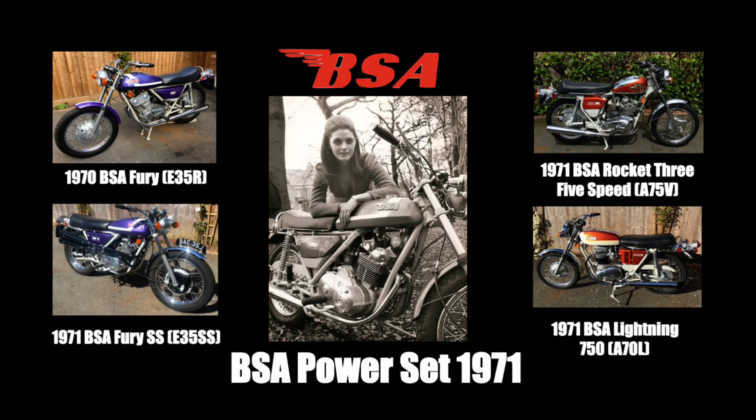Hi everyone, Saturday the 18th of November... what am I talking about? It's Saturday 18th of February 2022. It's not my birthday yet.

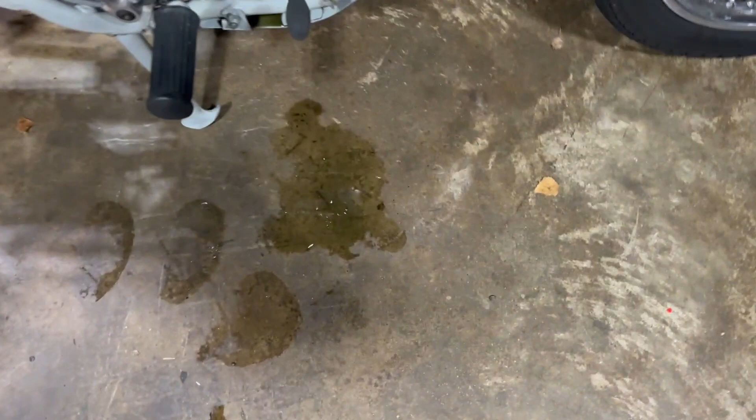What's happening is there's obviously an oil leak somewhere underneath, which is being captured on the bash plate and dripping out on this side. The previous owner thinks he knows what it was and it should be easy enough to fix, but we've got to take the bash plate off anyway so we can check the sump as well.

Now, oil changes on this are a bit more involved, so let me take you over to the manual and show you the intricacies of the oil in frame.

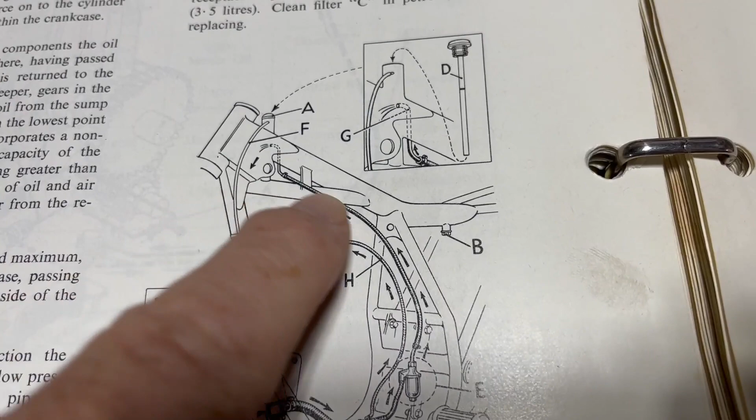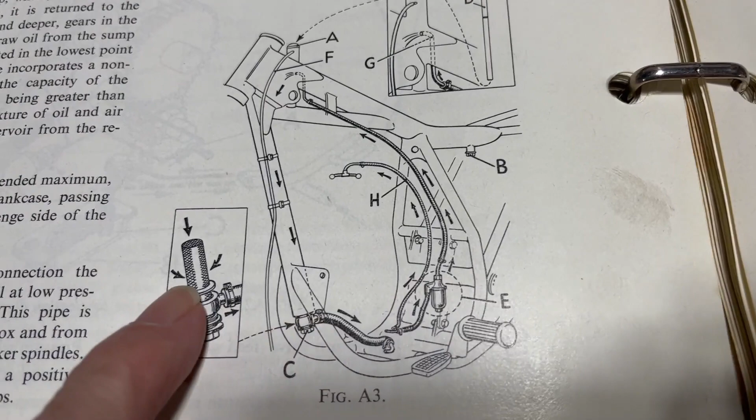So there we are in the workshop manual. You've got the main spine at the top here, the handle, which holds oil, and also the front down tube holds oil as well. Oil is fed from a union underneath a gauze filter at the bottom here to the engine, and returns at the back through a full flow oil filter in a canister up to the top here and to the steering head.

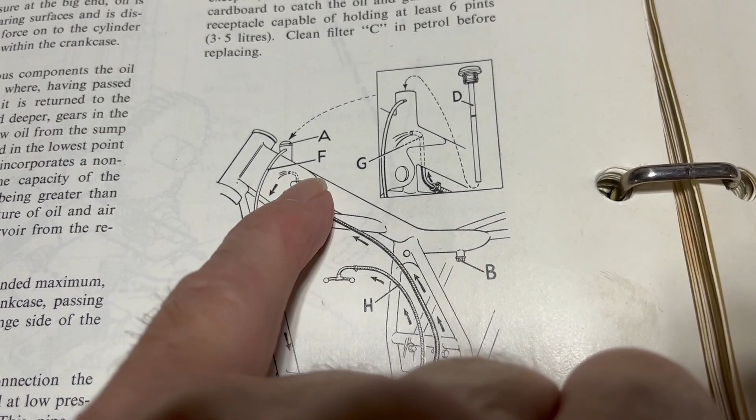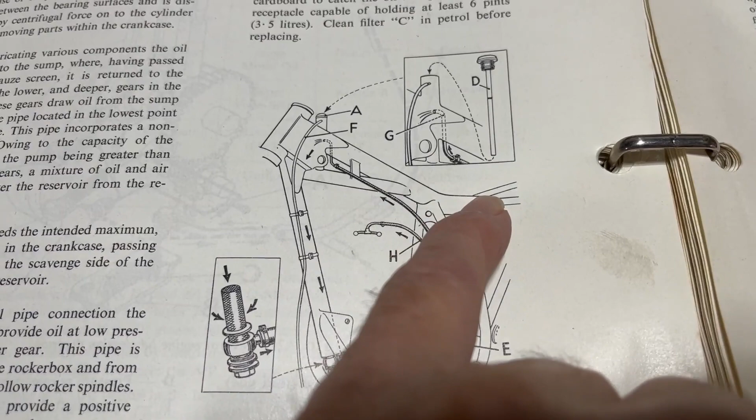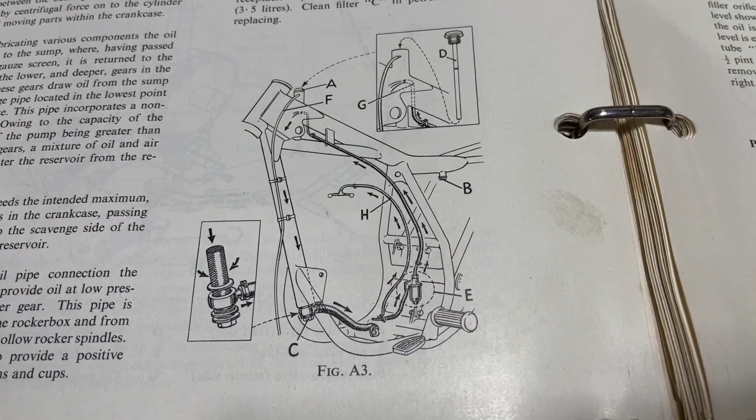Now, there's been lots written about the fact that oil at the back of the main spine isn't going to circulate as well, and it probably doesn't, but I presume when you're riding there will be some mixing of that oil. Why it was designed like that, I have no idea, I'm no engineer. But anyway, the point is we've effectively got three drain points.

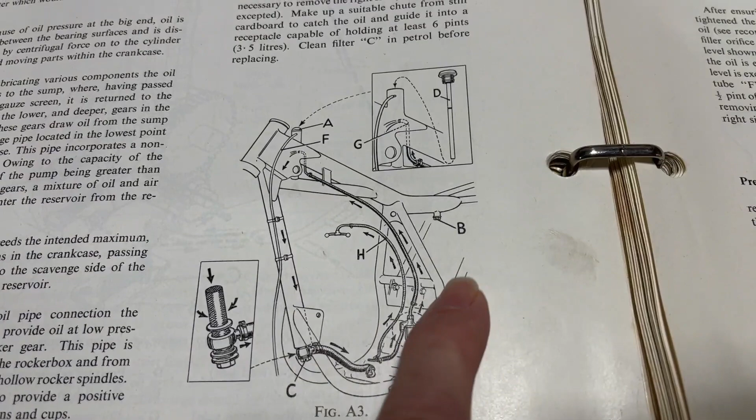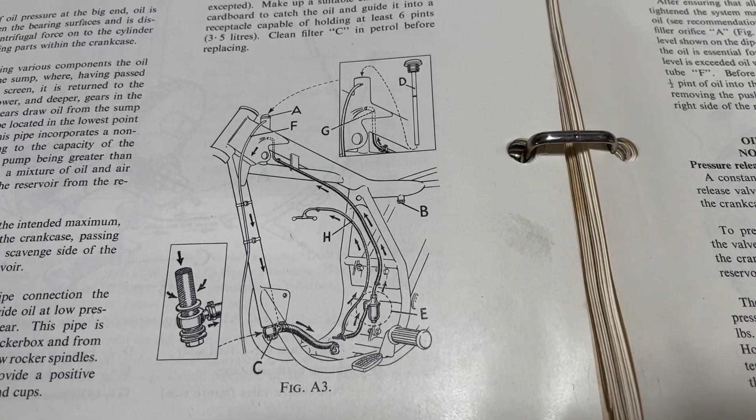We've got to take this union off here to clean that gauze and drain the down tube. We've got the oil filter to change, you can clean that in petrol but I've got a new one, so we'll put that in, the full flow oil filter. Then you've got to drain it at the back here, because just taking that out isn't going to drain this lot. You've got a plug there, so you've got to take a side panel out to do that. But first, let's get back to just getting that bash plate off.

That should be easy enough to do. Undo the nuts on the bottom engine mounting stud, just loosen them off, because the bash plate is slotted at the back there. Undo its two mounting bolts at the front and it should pull forward that way. And we'll have a look underneath and see what on earth's going on there.

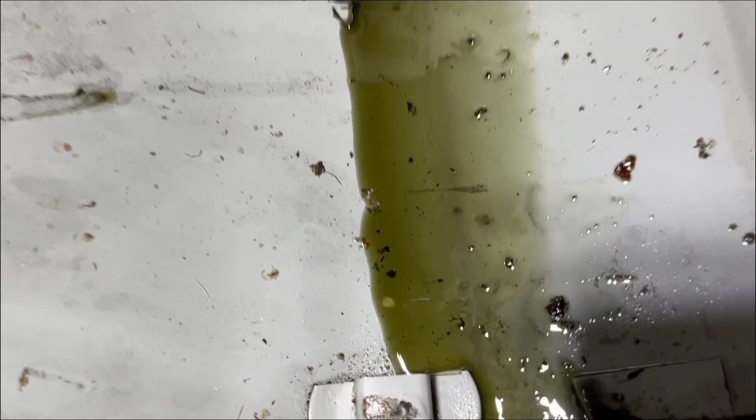Okie doke, first job. Right, two minutes later, bash plate off. Looks a bit like engine oil to me, that.

The front two mounting bolts are really short and actually have no washers on. I'll just check that's correct, because they don't look very secure. They were done up tight, but if the bottom of the engine gets a good bash when you're green laning or whatever, would that hold very much? But anyway, that's as it was.

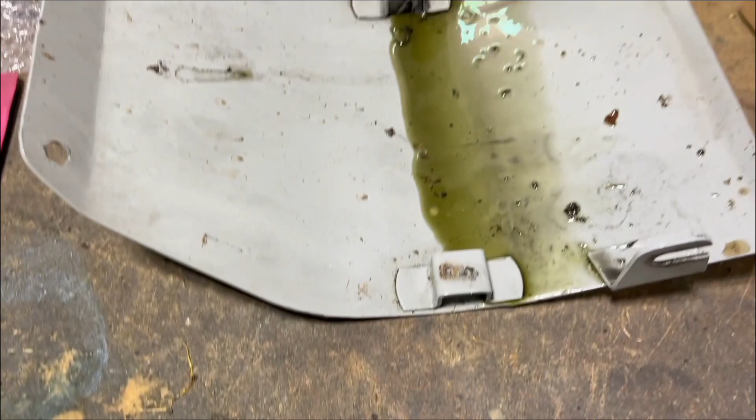And just while we're here, there's your little full flow oil filter, which are pretty readily available.

So let's go and have a look underneath that motor and see what's causing it to leak a bit. As I say, it's been stood for probably nearly three months now, so there's not much come out of it. Just one of those annoying things which I hate.

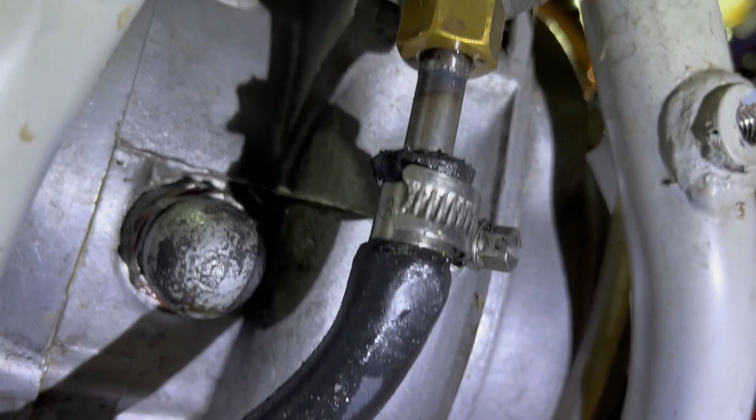Well, there's a few things to note under here. This is very tight here, and I've got a funny feeling that tube is cracked. The oil line is cracked a bit, the rubber tubing, so we might have to replace that. Doesn't seem to be anything coming out here, but that's obviously a new fabricated union at some point.

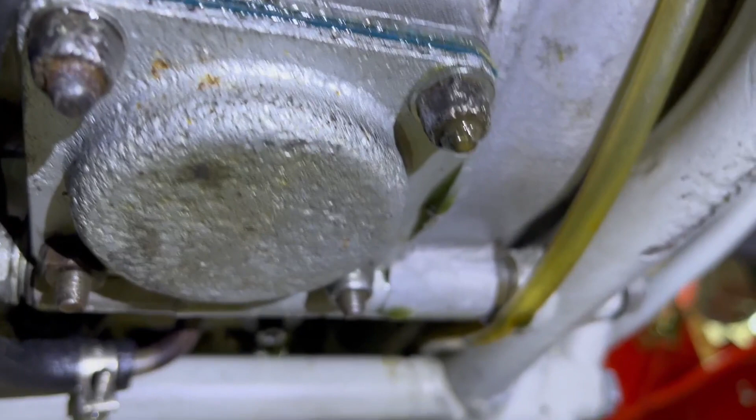Bit of oil around the sump plate with nothing much. Some just here, which means it might have wet-sumped its oil, but we'll soon find out.

Excuse me, but where it's dripping from is here on that oil line again. So we'll check that out. I think we're going to have to replace that.

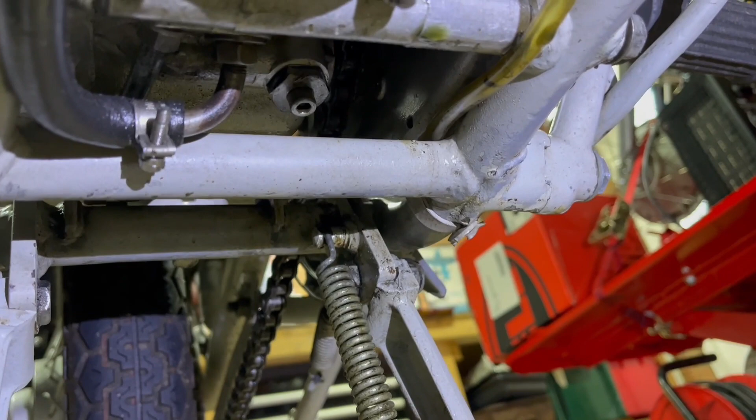And also, somebody's obviously tapped what I think is the gearbox drain, and put a little drain plug in there, but it doesn't look to be leaking. Not too bad, just a bit of accumulated oil. Maybe the problem we've got is just it sumping its oil as always, but we'll soon find out once we get that sump plate off.

I've just loosened the sump plate and there's the oil flowing out of it, so it's sumped oil. That might explain why it's weeping a bit out of the bottom cases.

These do have an anti-drain valve in them, but like almost all of them I've come across in any model - the triples, the twins and the singles - they very rarely work well. Anyway, let's get this lot drained off, then we'll move on to the other drains.

The gearbox obviously is a separate reservoir for EP90 oil, and also on these, the primary case is a separate reservoir as well for sort of straight 30 type, or normally, or you can use ATF. So we've got all these different reservoirs, and not forgetting the rear plug and the front plug on the frame to drain as well. So it's a bit involved.

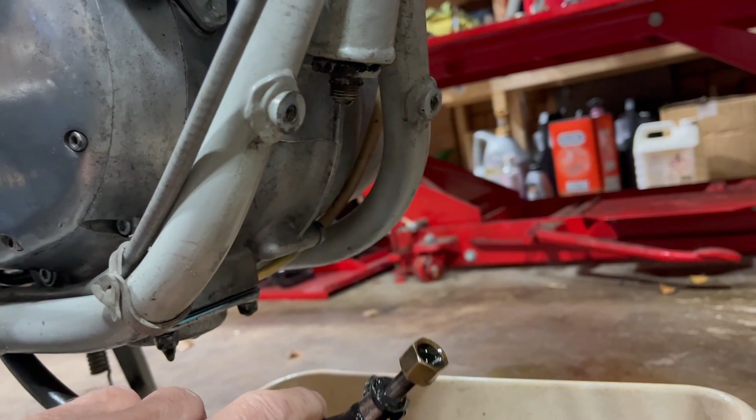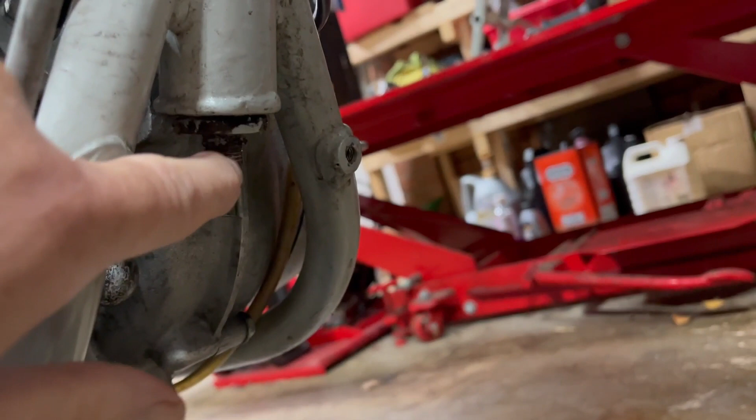So I've taken the oil feed union off what will be the gauze filter nut at the bottom of the front down tube. So that means now we can get a socket on this to get that out and just clean that gauze filter.

So it's emptied the front tube, but it hasn't emptied the top spine, so we've got to do that next via the plug at the back of the top spine. So let's get this out first and see what this looks like anyway.

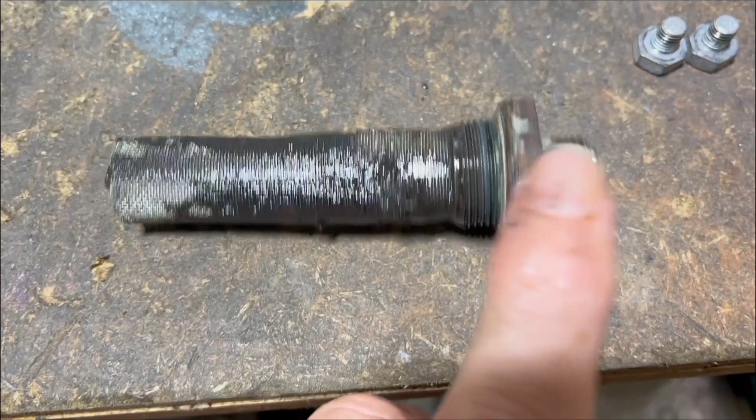Well, it's looking a bit sludgy. Yeah, so it's ready for a change, I think. The oil itself doesn't look too bad, it's a bit dark, but when you put your finger in it and test it you can still see the original green tinge. So I think it's Duckham's or something like that was used, some sort of classic oil. But that definitely needs a cleaning in petrol.

One thing I've also noticed with this and other unions, drain plugs and things on the bike, there's no fibre washers on them, and I'm sure they're supposed to have. So let's dig the parts book out as well and check that once we've got everything draining down.

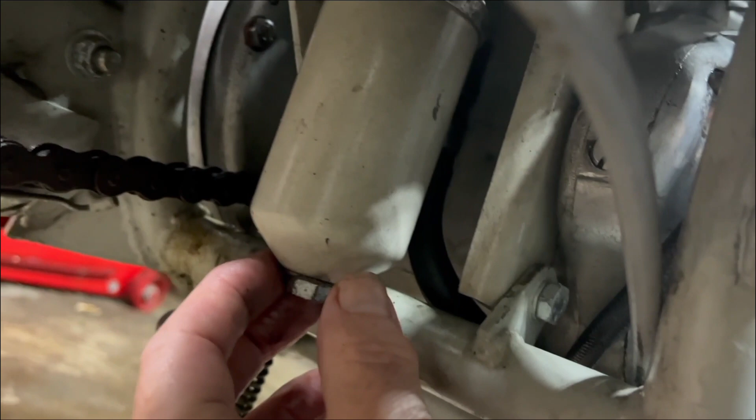But the next thing then is the oil filter canister, which lives just in there - you can just see the top of it there. And if I test my joints and get prone, there it is. So should be able to just spin that off.

Although I notice that looks like a drain plug rather than a hexagon to enable you to unscrew the bowl. Anyway, we'll get something underneath that and unscrew that, and then we'll get a good view of how filthy that is in there.

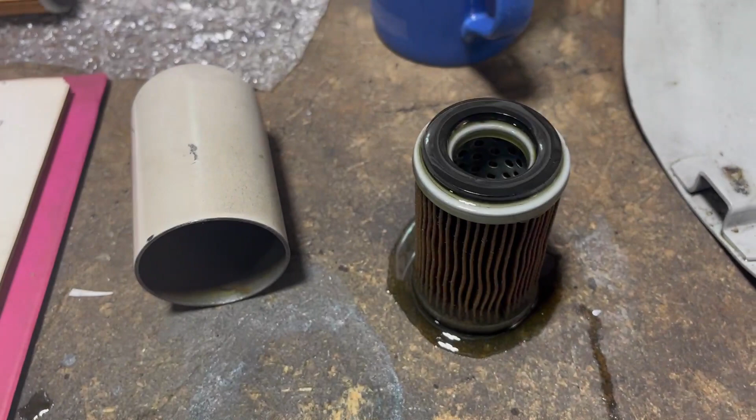Oh well, I'm a bit more heartened by this - the oil in here was quite clean. Filter's obviously not that old, but I will change it anyway, just for peace of mind.

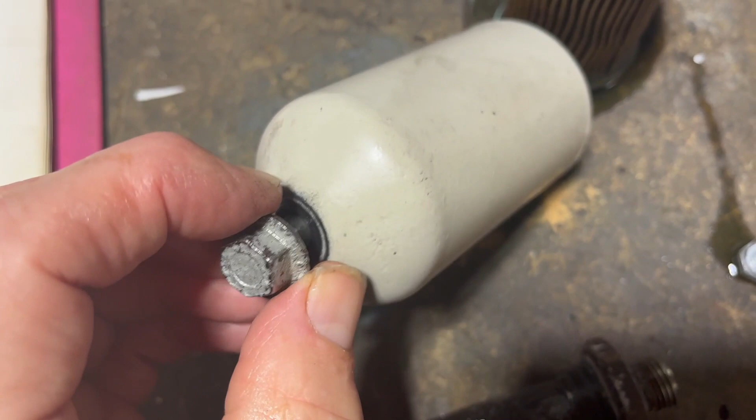The oil filter housing is clean, I've wiped it out. This, if you like, is a bolt that goes through the center of the filter to hold the housing on. And yeah, there's no washer on the end of this, but the end of the housing has a rubber insert - I think you can just about see that black inner ring, not the outer one, the inner ring. So that works quite well. So that's good news, easy enough to sort out.

Right, next then, we remove one of the side panels - I think it's the left-hand panel - to get to... sorry, just having a look round to get to the drain plug at the back of the spine, top spine frame.

Let's just have a look in the manual. What does it say?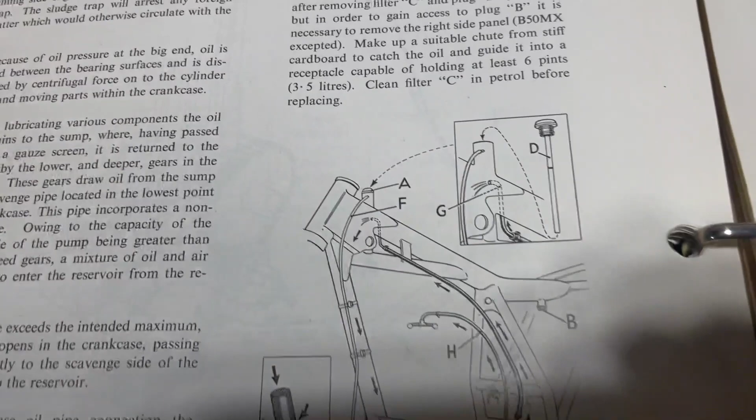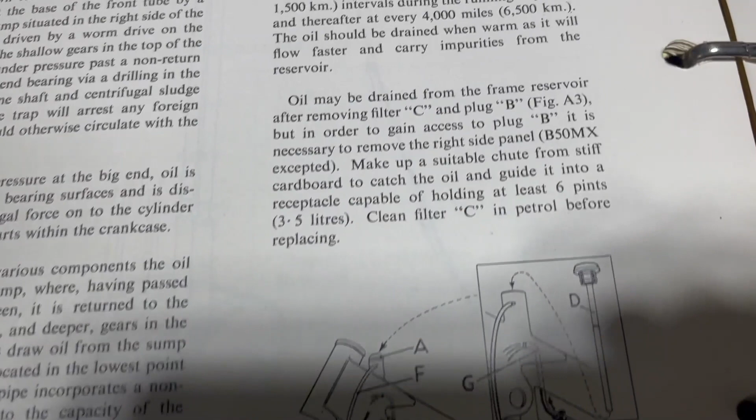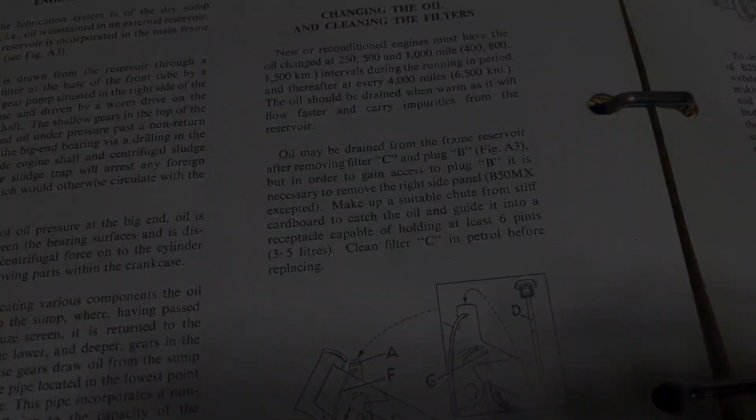Necessary to remove the right side panel. That's right, which is the side of the battery. Right, let's do that then. Before you say I'm wrong, the right hand panel is the side of the battery, because the other side is the air filter which gets in the way.

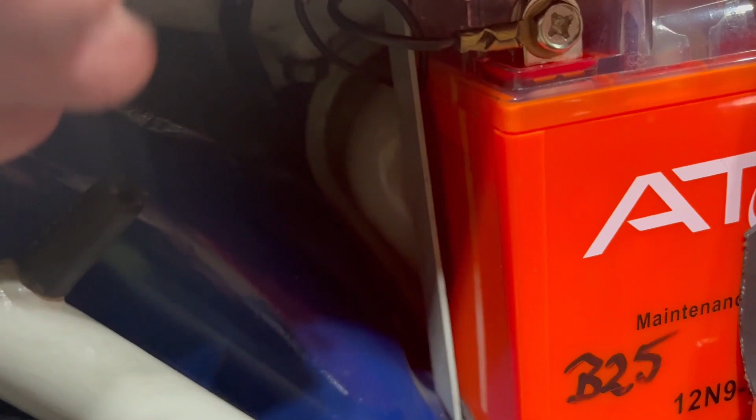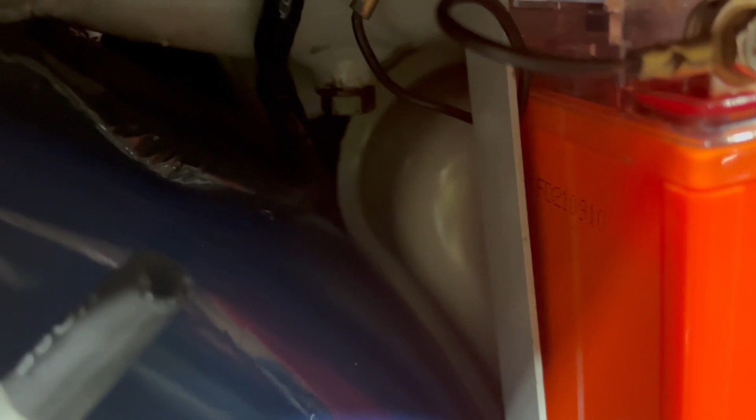Sorry about the light, we seem to be getting a bit of a reflection here. There's the drain plug there, and that's better. The recommendation is obviously to try and get a channel or something made out of cardboard to direct the oil out, across and down into there.

So let's make something up and get that back end drained off.

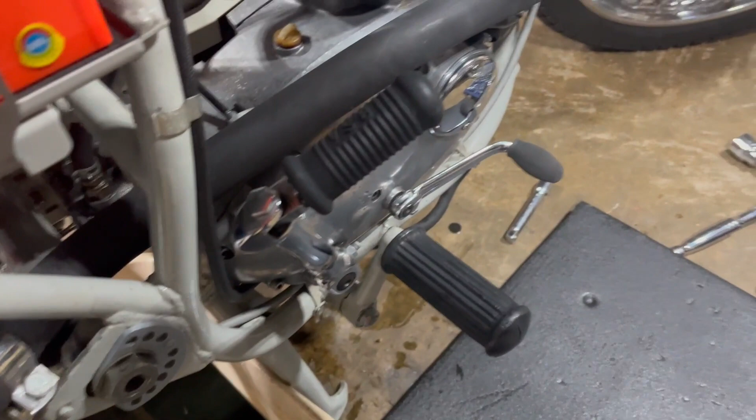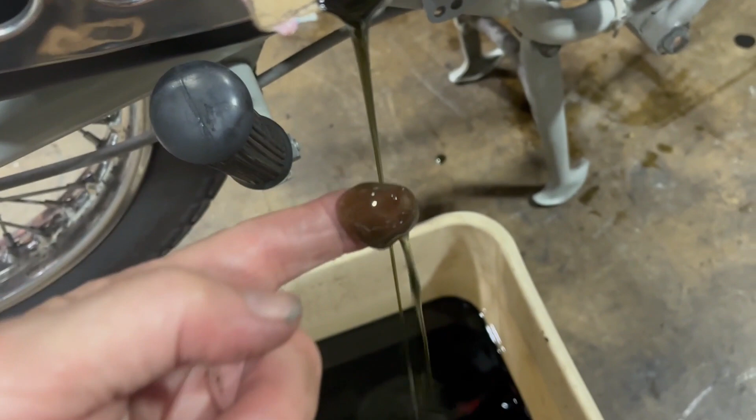There we go, draining away, but looking a bit... no, it's not too bad. Bit of a slow drain, but anyway, works pretty well. There we go, a cardboard channel, patented. Right, that's that side sorted out.

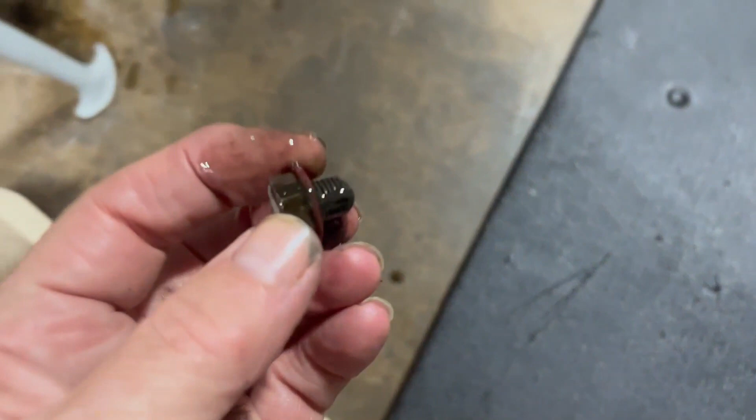Now, certainly at this end, the drain plug did correctly have a fibre washer on it, so that was dry, which is great. So we need to make sure we do that with some of the other plugs, I think.

Right, next we'll let that drain away. And in the meantime, we'll clean up the gauze filter on the feed side at the bottom of the down tube.

Right, there's the sump plate. There was a bit of a film of sludge in the bottom of that, but again, the oil was pretty clean. So I'm not sure how long ago that was cleaned out. The filter, the gauze filter for the sump was fine. I've just given that a light clean in petrol.

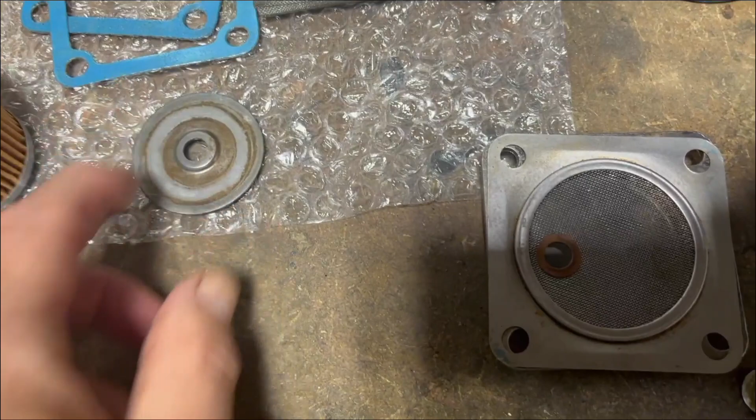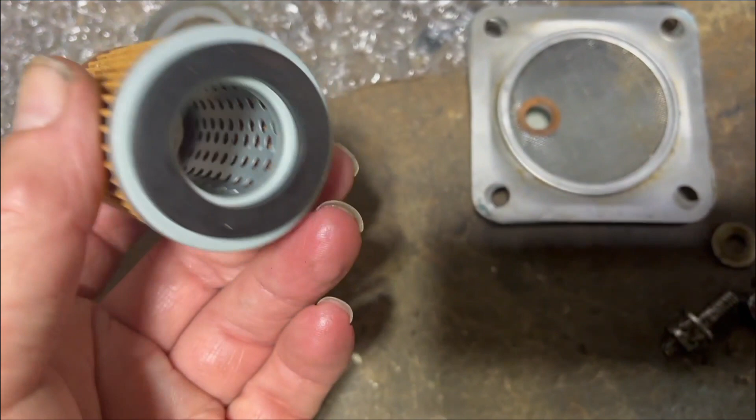Gaskets were good. They had a couple of gaskets, one on either side of the filter, which is correct. But the other thing I've just noticed with respect to the full flow oil filter pan is this metal supporting plate needs to go on the underside of the filter, and I nearly chucked that away with the old filter. So now these filters have the same size hole at each end, but I think the originals had a smaller hole at the end that sits on the bottom. But anyway, it goes on there, and then that slides into the bowl that way, I believe, but I need to check that in the parts book.

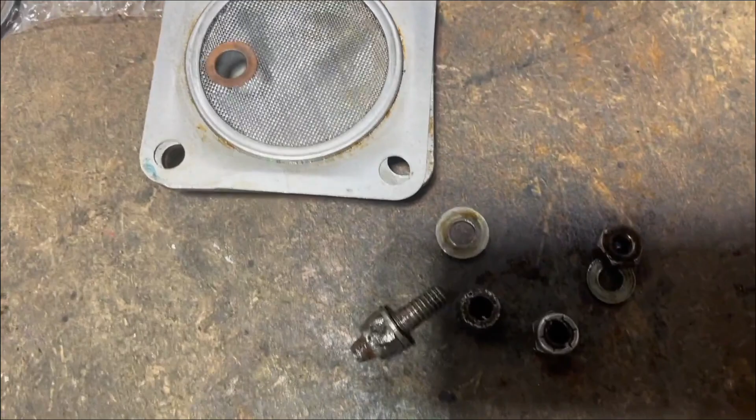The only other thing of note is the sump plate was held on by a bit of a mishmash, really. So I think some new nuts are in order if I've got some in stock. Those three are actually correct, but not in very good condition. That one is wrong, and it was a bit tight getting off, so I'm not sure whether that's slightly the wrong thread that's been forced onto the stud. But let's see if we can sort out some new ones.

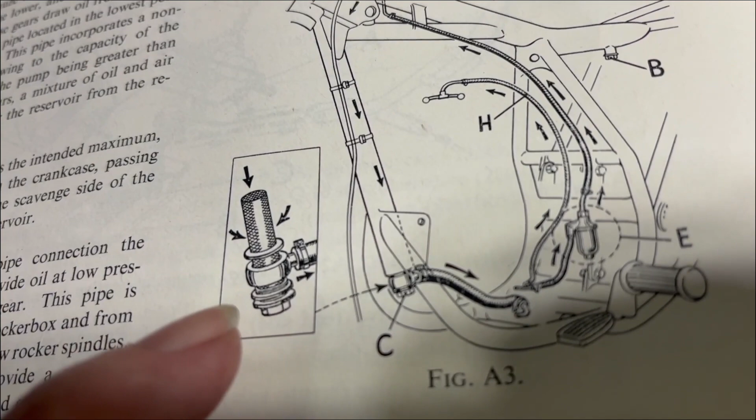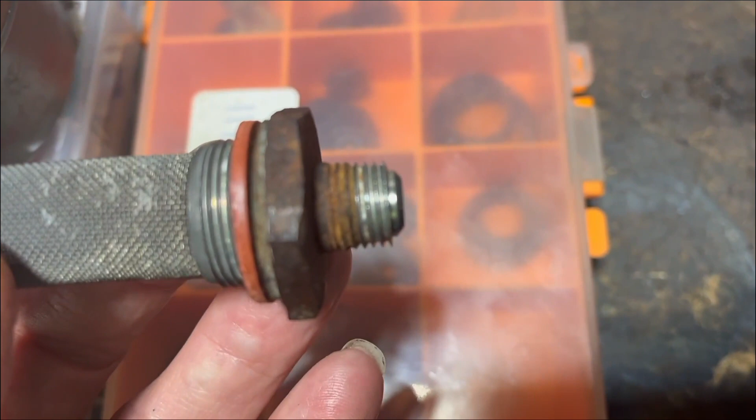Right, everyone, just as I'm beavering away, here's another observation. I was just looking into securing a fibre washer for the down tube gauze filter housing, the screw on, and indeed it does show washers in the workshop manual, but as you can see they show a banjo fitting to the oil pipe, whereas what we've got is what you'd see normally on some of the other models, i.e. the twins and triples. We've got a screw-in gauze filter, but a

pipe union on the end of it, so that's different. Anyway, we'll put a washer on it. The gauze is cleaned up really well. It's nice and clean. We'll just tidy up all this rust here. We'll just give that a bit of a wire wool treatment, and we'll get that back in.

That's a bit better. It's not perfect, but it's indicative of all the fittings and certain items on the bike where it's displaying pitting, etc., which seems to indicate a previous owner tried to do a cost-effective restoration of this. It must have been in a hell of a state. This engine cases, etc., are all pitted like that, so it doesn't matter whether it's steel or aluminium or anything, it's all been pitted. But anyway, that's a bit better.

So we'll just fit that up, and then we'll get a bit of aluminium paint on that, just to try and keep it clean.

Right, this is the primary drive drain that you can see there, and the level plug. The drain is leaking, and looks to me as though, again, it hasn't got a fibre washer on it. But anyway, let's get this drained off.

I've got Castrolite or Castrol Straight 30 in stock that'll go in here. I have realised that I haven't got any gear oil in stock, but I've checked the level on the dipstick there. You can just see it, which you unscrew at the back there, and the oil is up to the right level in the gearbox, and it's absolutely spotlessly clean. So I'll leave that for now, but I'll need to get some in stock to do a quick change.

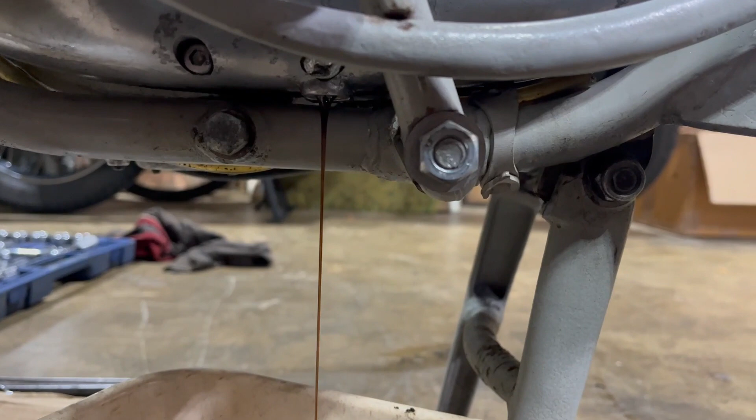But anyway, let's carry on with this and see what we get out of it. Good news, there's oil in it, and it is different oil too, so I would imagine it's slightly thinner. It's not the same that was in the main engine oil tank anyway.

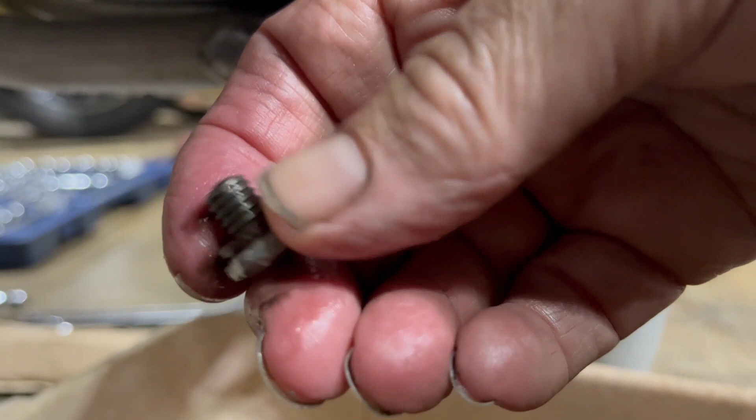The little drain plug did have a washer on it, but the head's a little bit rounded, but it does have a washer. So we'll see if we can just tighten that up a little bit better with a socket, but not too much as to strip the thread. But it is, I would imagine, UNC.

Right, we'll get that drained off, and then we'll fill it. I'm pretty sure that's the drain, level screw there. We're just checking the manual, but I'm pretty sure that's the case. And we'll get that sorted out.

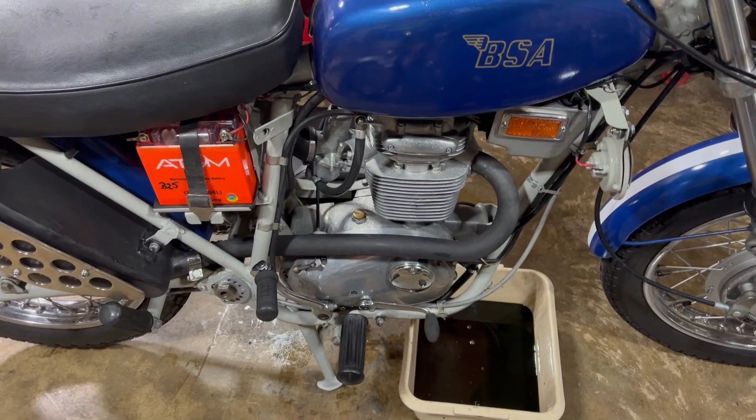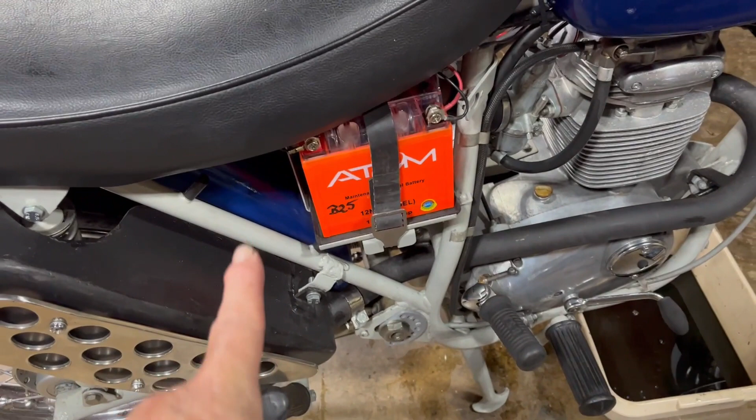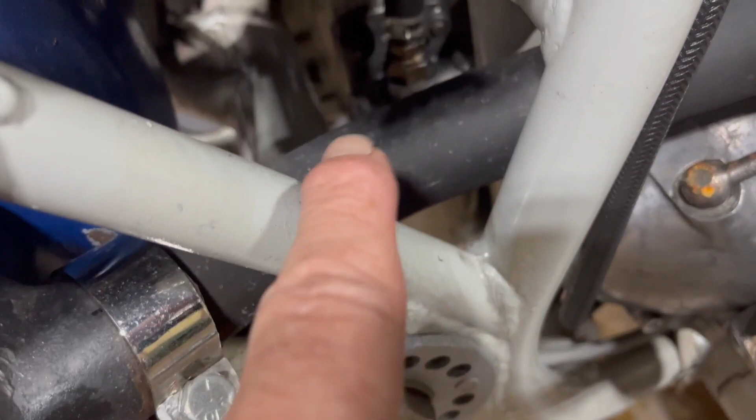Right, we're just about there. The down tube gauze and union are back on, the gauze with a fibre washer. The rear plug under the seat is back in with its fibre washer. The oil filter canister is back on with a new oil filter, and we've changed the oil in the primary chain case. I'm leaving the gearbox oil for now - I haven't got any in stock, but it looks good and it's up to the mark, so that's fine.

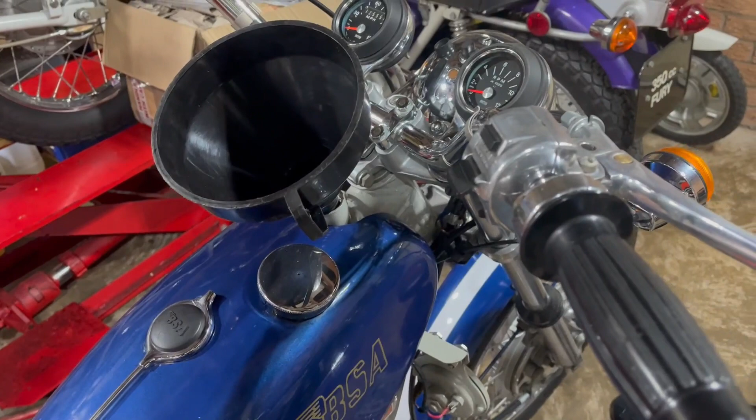So now we've just got to fill with 6 pints of oil, which should take it up to the level mark on the dipstick. But then we need to kick it through to fill the oil filter canister and get it returning, which I normally like to do before I start it up. They do recommend putting a bit of oil in the sump through the rocker box cover, but I'll take the plug out and kick it over a few times and check a few other things as well. So yeah, 6 pints into there, and we'll take it from there.

Just while we're filling it with oil, this is what the underside looks like now, tidied up a bit, and also new nuts on the sump plate. This stud's a little bit proud, but I don't want to force it, and the nut goes on fine and tightens up. Pleased with that.

Right, let's plough on with filling. Some of you that know these machines better than I do might be screaming at me saying it ain't 6 pint capacity in the main spine frame - it's 4 pints. You can see there's the indentation in the dipstick, which is at its maximum oil level. If I can get this back in there... there we go. Yeah, it's right to the top.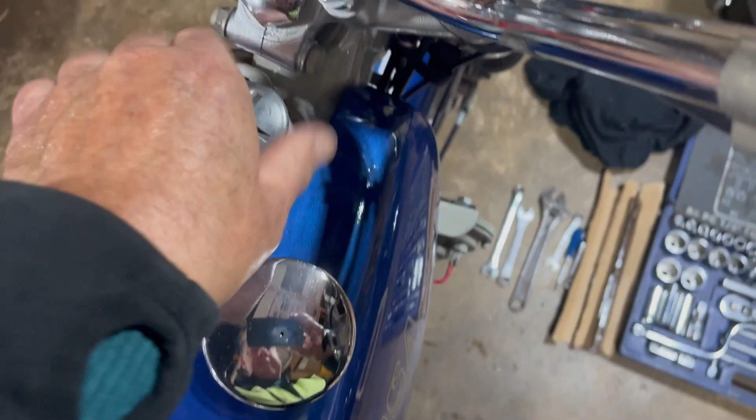Now what I'll do is a lot of kicking over on this to get the oil circulating, but also we need to fill up on the return side, which isn't too bad - we need to fill up the oil canister around the full flow oil filter. So that's the next job. Plug out and give her a good few kicks.

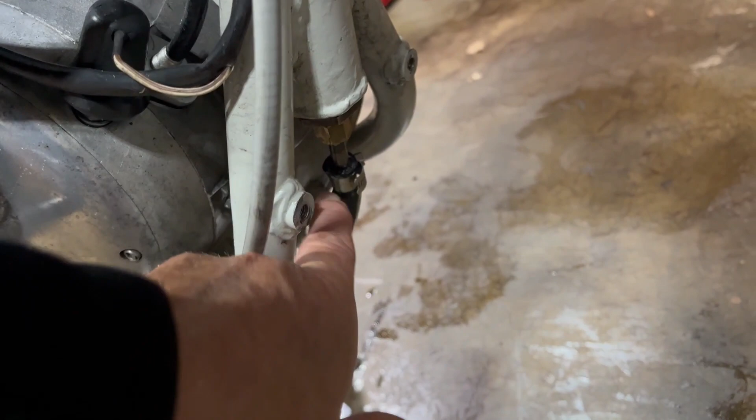Right, I've given a good few kicks. I haven't checked oil pressure or anything like that just yet. I just wanted to get some oil circulating around, and I'm just going to leave it to stand now, just to see if we've got any leaks from the feed side, especially because I'm still not too sure about this union here. Seems to be okay at the moment - sorry, it's a bit dark down there. But we'll leave it a while, come back, give it some more kicks, turn it on and see if we're getting oil pressure under kicking, and then we'll know the feed's getting through. And then we'll just make sure she's not dropped or there's nothing untoward going on from anything we've disturbed, and then we can put the bash plate back on.

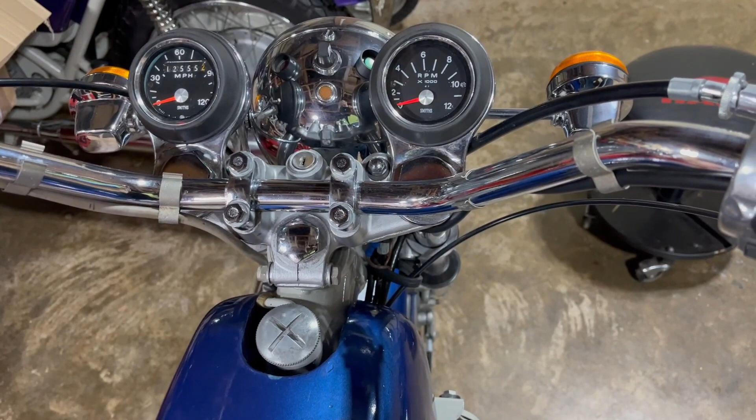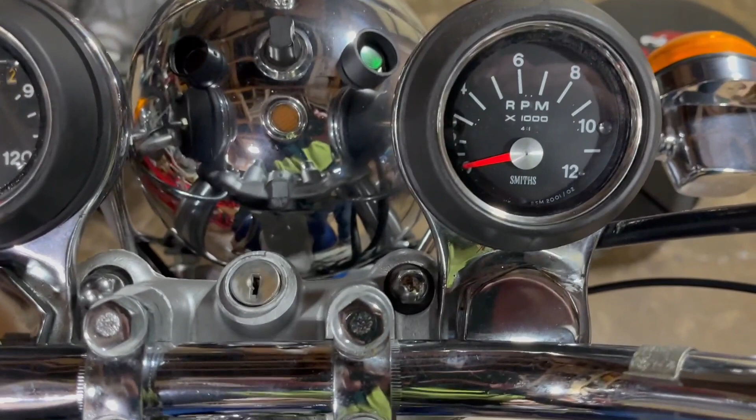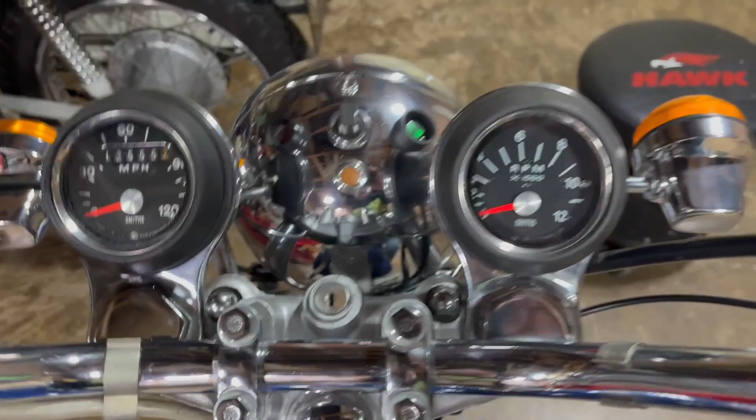Right, back an hour later, kicked it over a few more times. I'm pretty sure that we're getting oil around the crank now and beginning to return. So a quick test is whether it manages to pump up its oil pressure. Ignition on. Oh, there you go - oil pressure warning light out straight away.

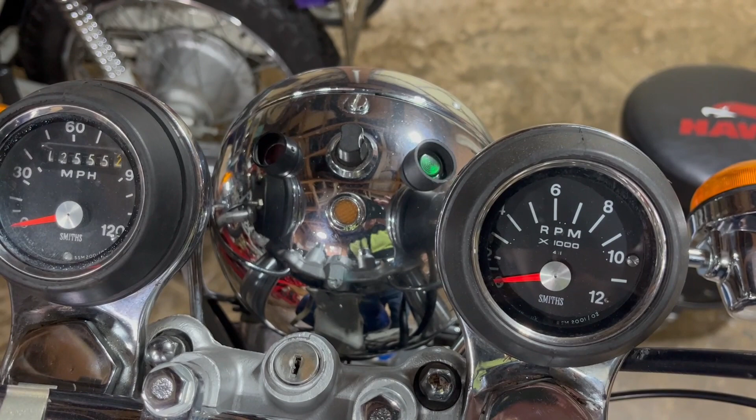It is new oil, and it's probably a little bit thicker than what was in it. I use Penrite oil for classic vehicles, which has a fantastic reputation - quite a wide range of viscosity as well, depending upon temperatures and stuff. It's supposed to be good for maintaining oil pressure, which is why I started using it in the A70, etc. Yeah, there you go, happy with that. Battery's all good - I did charge it up before I went away.

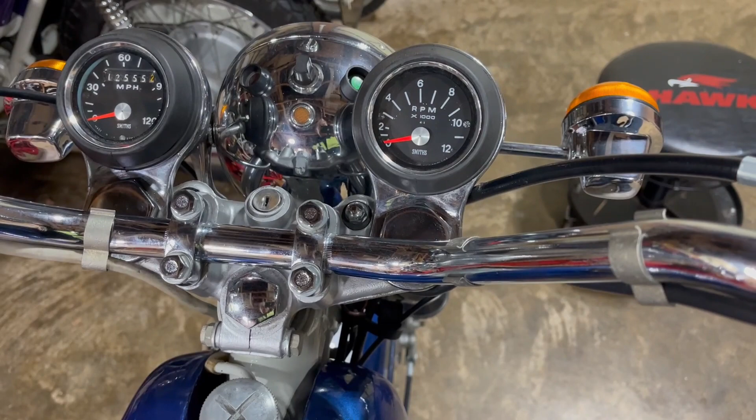Yep, fantastic. Right, so it's now Saturday evening. It looks as though we're going to be all set for a run out tomorrow morning to the local monthly classic vehicle meet. All I've got to do is put the bash plate on, top it up with petrol, and just check around again, check the tyre pressures too, although I'm pretty confident they're going to be all right. I'll put on the chest harness for the GoPro, get that charged up now and try to get some shots on the road so you can hear it running, because I don't think I've done that yet with this bike, and hopefully demonstrate how quiet it is unless I've messed it all up. Right, on we go.

Right, everybody, next morning, and there's one little tiny fresh drop under there - there it is. But other than that, not too bad. So I fueled her up, and we'll start her up now, and then we'll get the torch in the hole, make sure the oil's returning once the full flow oil canister is filled up. But we know we've got good oil pressure, so let's fire her up.

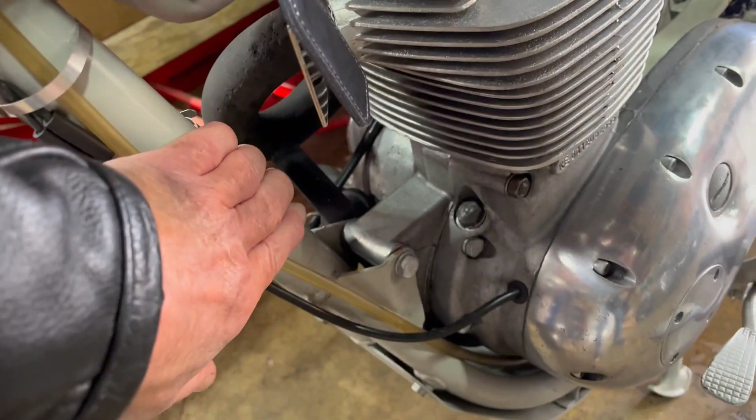But very pleased with it. As it's had a good run, you'd have thought the frame, that front down tube is warm. Yeah, that is warm, so the oil's been getting nice and warm, but the top tube, yeah, there's a little bit of heat in it, not much. Engine is really good and hot, and as I was getting more confident with it, I did rev it a little bit just to test it out, but yep, seems all good.

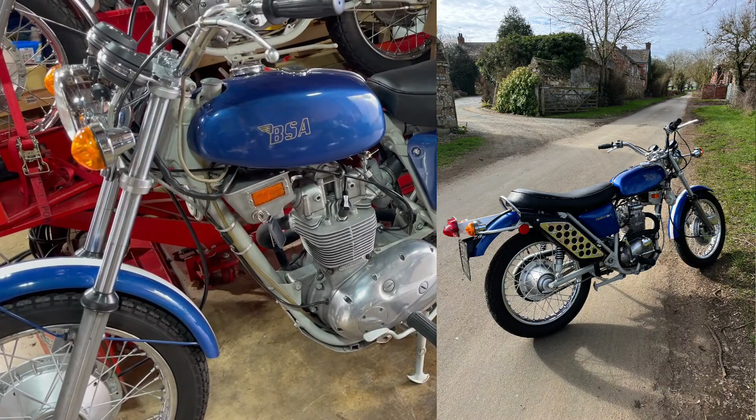And here's a photo I took while I was out over at a village called Welham, and I'll submit that to see if the editor at the BSA Owners Club Star magazine wants to put that on the front cover. Sort of a rustic country pic in East Leicestershire.

Right, we'll leave it there for now, but we'll do some more riding on this as a regular for a while. I might get over to the BSA Owners Club meeting in the next week or so, and that'll be more of a 50-mile round trip, which will be a bit of a test. Or I might decide just to do a bit more local testing first. But yeah, getting some confidence in it. It started first kick from hot, from cold it takes 2 or 3 jabs just with a bit of a tickle. There is no choke on it. But yeah, very, very impressed with it. They've got a reputation of being a bit fragile, so we'll have to see.

Right, we'll leave it there. Next up, there's going to be the Fury gearbox behind it.